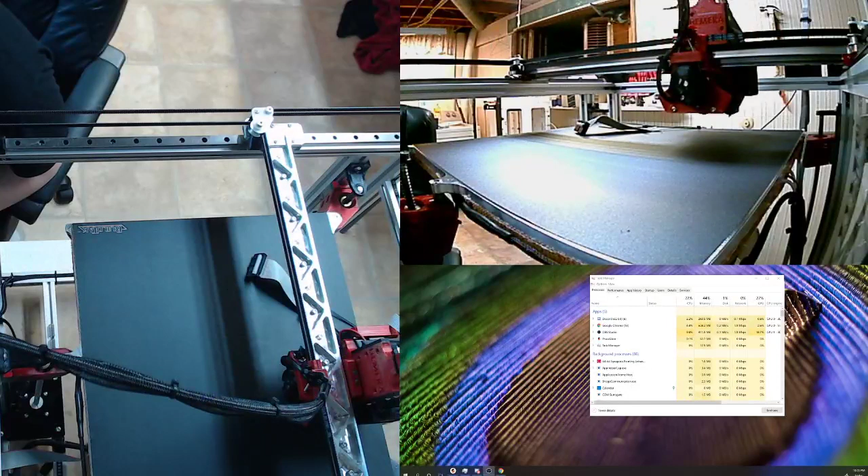You had just left last night when I identified that one of my heat set inserts in my motor plate was crooked, and Josh was like, 'You can't fix that.' And I went, 'I think I can,' and so I did.

Yeah, you should be able to fix it depending on what the issue is. It was crooked, it wasn't flat. Yeah, I mean, just reheating it and straightening it out should do the trick.

Well, what I did is I had a washer, an aluminum spacer, and an M4 screw. So I heated it up, threw down the washer, threw down the spacer, put the screw in, and cranked the screw up until it was tight, and it pulled it up flat against the washer. And then I wiggled it until it was vertical and flat, until the washer was flat against the plastic.

Nice. And I let it cool down, took it apart, and bingo. Perfect, very nice.

Yeah, the other thing is, I don't think he's got, and I was looking for him, but I don't think he actually made the motor plates, the 3D printed motor plates.

But I don't know that the aluminum corner braces need cover top plates. I don't know that they do. You don't know that the aluminum corner brackets need what? The aluminum motor plates. I don't think they use a top plate on the pulleys. Or maybe they do. Should.

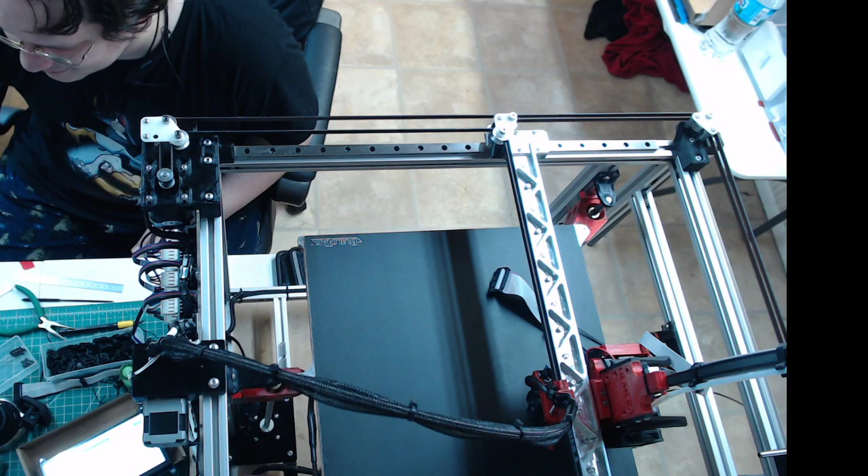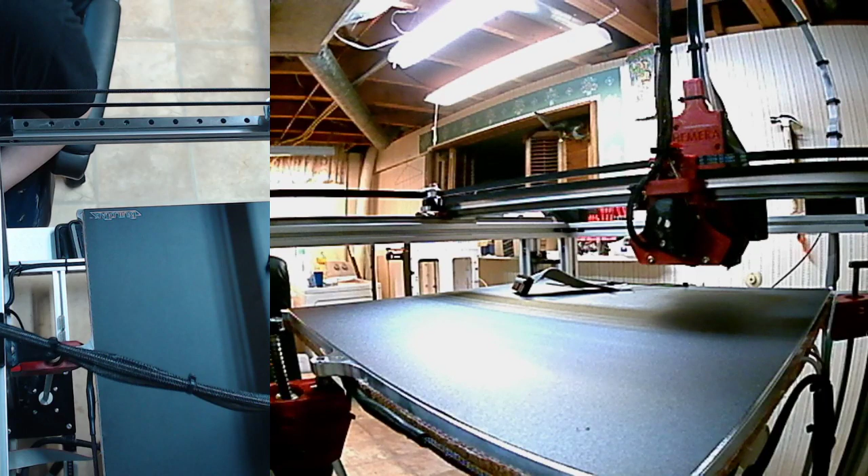So we have a Skype, or not a Skype, we already have a Skype set up, but we've got a Discord channel now, or Discord server now, and we have a Slack workspace, and we have a Zoom account.

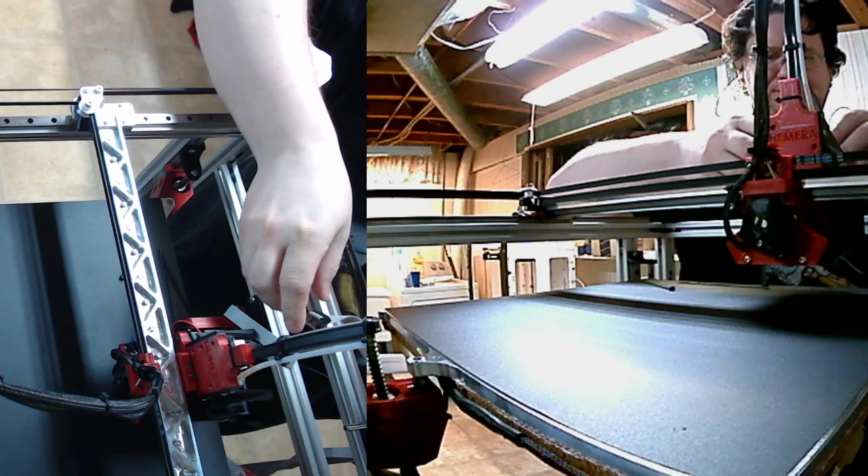This is a nonprofit, or not a nonprofit, but a small organization that I belong to that I'm on the board of directors for. So I'm like, what's it going to cost us, and what is it going to do for us as far as our ability to collaborate on projects.

I think we should pick a platform, to be honest, because the more platforms you add, the less people are going to be in the same place at the same time.

Well, the thing is, we've got people who work in different industries at this point, and some of them are working in industries that they're on Slack all the time because that's what they use for their workflows. So we got a couple of people who basically live in Slack, right?

Well, I don't know. I would personally push for solidifying on a platform, but that's just me. Yeah. And that's what I'm saying at this point. Even if it's not your favorite platform.

And that's kind of what we were doing. So right now we're going to probably spend a couple of weeks working in all of them to see what people are most comfortable with and what they have most access to, because right now we're trying to sort out our access requirements.

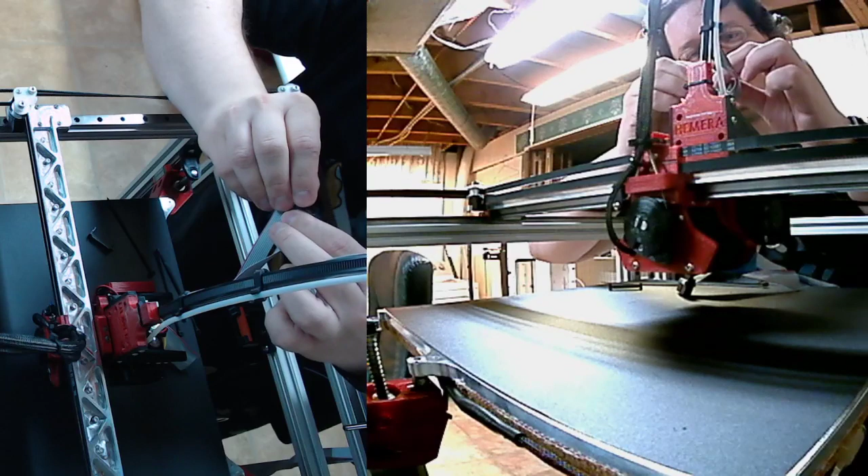I have 6 stepper motors with integrated lead screws sitting in my closet right now. You know what, I got an idea - just from a shits and giggles standpoint, you could use those integrated lead screws to do something along the lines of building a fully restrained driven axes, so you could build your little router or little machine thing. So you're saying use the integrated lead screws for all the axes?

Yeah, you could essentially do a sliding cross table kind of thing, and because you don't need high speed movement, you need precise movement. So these are 0.9 degree, right? Should be, they're the E3D ones. I don't remember 100% what they are, but yeah.

Interesting thought. It would make a whole bunch of stepper motors that are essentially useless to me useful. Because that way you'd have a lot of Z travel, but you don't need to use the whole thing - I mean you could even cut the lead screw, but I wouldn't necessarily want to do that. You could essentially build a mill. Yeah, it's definitely an interesting idea, one worth exploring.

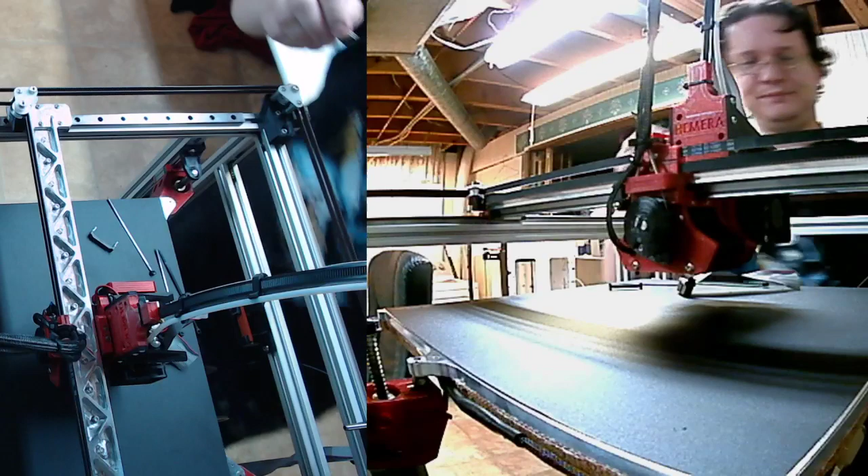He's just talking about some of the electrical safety stuff that I've posted previously, about standardizing wiring colors and things like that. Which is why I've got many spools of wires in various colors, because I want the colors to match what I need them to do. So in my AC circuits, I'm using white, black, and green, or white, red, black, and green.

Your black and red are your hots, your white's neutral, green's ground. In my DC circuits, I'm using red and black, although I almost wish we didn't have red and black defined as positive and negative, or positive and ground. We're basically running 24 volts on pretty much everything, right? Right, and black and red's a pretty standard color scheme.

It is, but do we have any 5-volt circuits? Do we have any 12-volt circuits? Are we just running 24-volt circuits? I am, yeah, aside from the AC stuff. So that's the thing - I think there are color codes out there for 12-volt DC, 24-volt DC, or maybe if we had a wiring chart. That's part of the wiring stuff.

I think at work we use all blue. Yeah, I think we got blue and blue with a white stripe for the positive and negative DC. Yeah, that's kind of what I'm thinking, that there are standards like that. I think it's pretty common. I would go to work and look up exactly what our color schemes are, but...

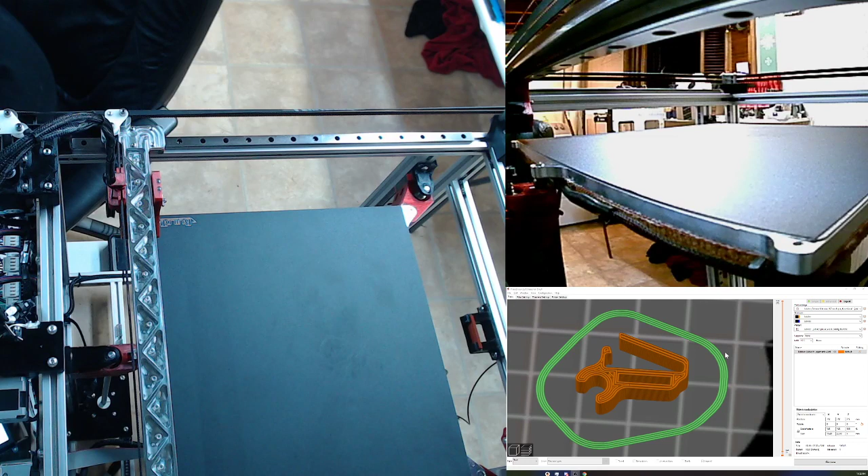I find it weird that you can't right-click on the models in Slicer. It'd be nice if you could right-click and delete, or right-click and hit update, and if you updated the file, it would update the CAD, like re-import it. Yeah, I think that would be cool. Feature request, maybe. Well, Josh has changed the way the...

Oh, you even oriented it. Good. Did I? Well, it's oriented correctly. Whether or not you did it on purpose, I have no idea. Oh yeah, of course I did it on purpose. I'll take credit for that.

I kind of want to upgrade or replace my desktop computer, and I actually have one that should do it. It's not easily accessible. I have too many computers. Well, I have my main desktop computer, which is substantial. Then I have a pretty nice laptop that I ordered back in November.

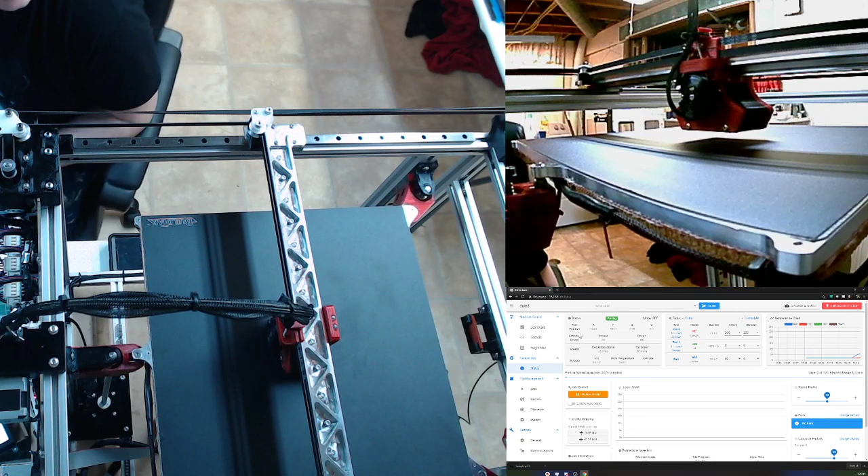And then I just picked up a Surface tablet for like 200 and something. Or I mean a Surface Pro, rather. And I'm not going to count my work computers. Oh, I have two work computers in my house as well, and I have two laptops that are dead in my closet. And I'm not counting my wife's computer either. I have my nice MacBook Pro that I got last year, and I really ought to bring it out and plug it up out here and use it because it's got the i9 in it, 32 gigs of RAM, and a terabyte flash drive.

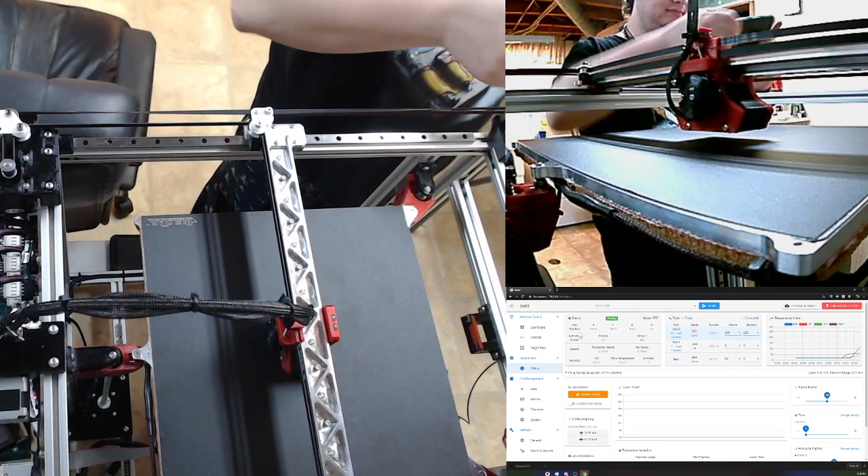I think the Gimbal Mount is actually doing for you - well, here, let me snap a picture of what I'm seeing right now. Discord... thought it was going to change. So, oh, that. Yeah, that's pretty.

Like when it's up here, it'd be nice if this thing could tip back to relieve that bend a little bit. I mean, it's still gentle, but it would be nice. If it does tip back, how much of it is it actually going to relieve? I think quite a bit. Well, I meant compared to what's below it, right? I think it's in our... True, if it's gimbaled, it's just moving the bend somewhere else, I guess. But yeah, it'd be moving the bend down farther away from the zip tie, which is going to limit - the zip tie is going to limit your amount of bend that you can have.

So was he going to take the zip tie out? I thought he was going to do that. Well, that's weird. Huh, not sure what that was about. Hey, it purged. Good. Oh, did it do the purge?

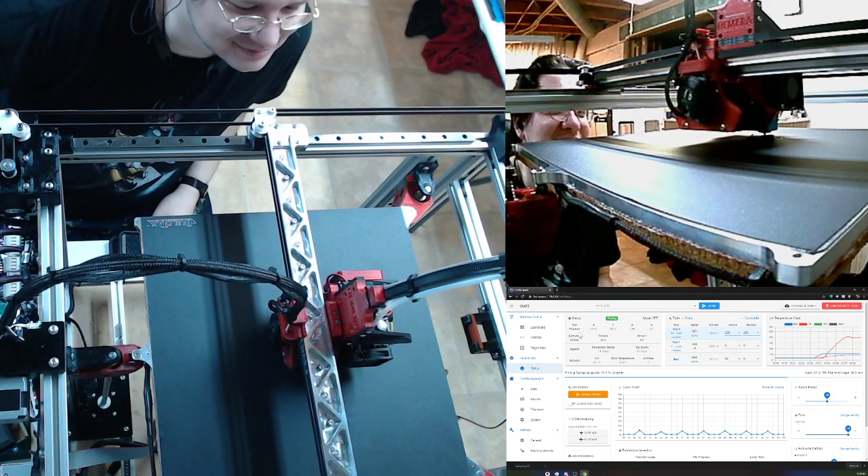Okay, so I don't know what I did. Maybe it's still trying to open it. Maybe I've got too many things running. I would not be at all surprised if I have too many things running.

All right, so I have my locking plate. I have carriage parts, I have a twist block. I have 3 of these, and I don't know which one I got that's the best one. All 3 of them have been polished, all 3 of them very well.

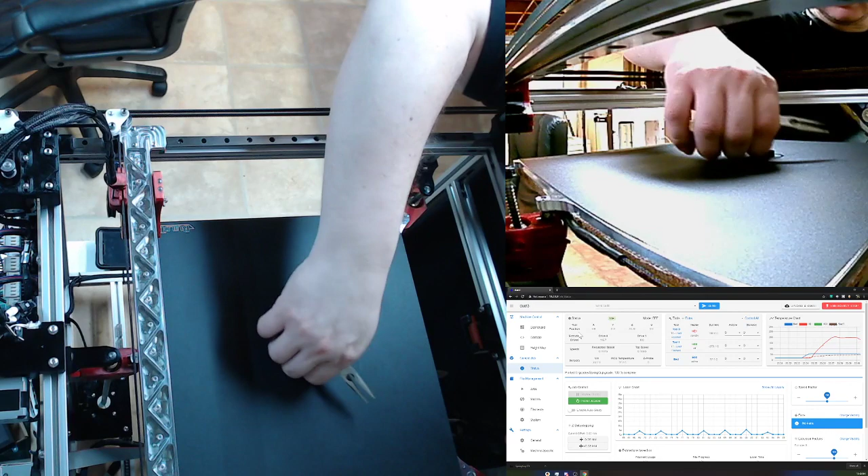So I somehow ended up with 2 complete sets of carriages. I printed 2 sets, and I don't know why I've got 2 sets. Carriages, like the part that goes on the axis, the clamps to the crossbar. And I have 2 lock plates as well. Does one set have serial numbers? None of the sets have serial numbers. Do I need to print new ones? I don't know. I hope not.

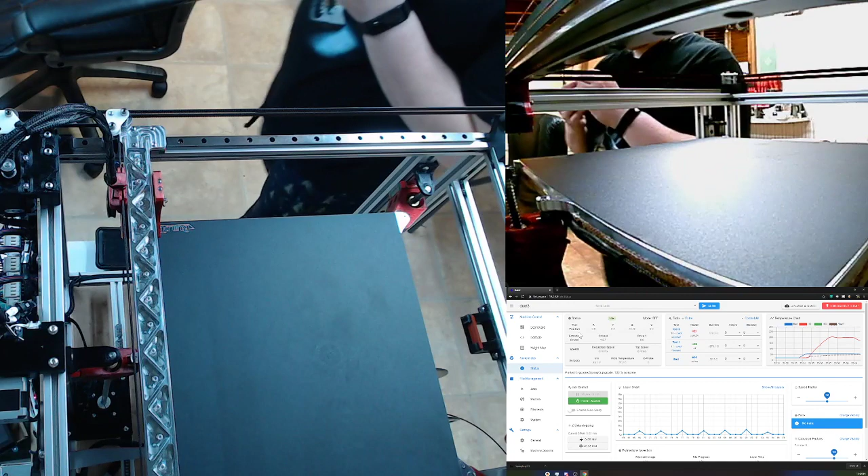I also don't have one. I don't know if they've got one. I think we've got an STL already of the one with serial numbers. Oh bother, I actually have 4 of the plates in the back because I was trying. Some of them have serial numbers, some of them don't. I have 1 with serial.

See, I have CPL01. And I couldn't tell you if CP, and I have two of them. I printed one at 0.2, and I printed one at 0.12, and I like the one that printed at 0.12 a little better. I don't like either of them, but I'm gonna end up sanding the back until it's super smooth.

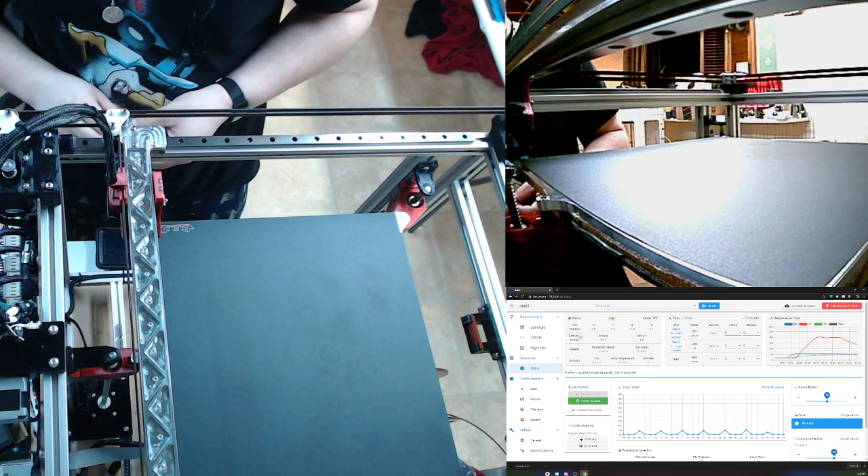Where are you sanding what now? So on the lock plate, CPL, the part that goes in the back of the carriage lock plate. You don't really need that to be smooth. You're talking about where, like the side with the twist lock, or the side with the wires? The side with the wire. Oh, okay, it doesn't need to. I mean, that doesn't really need to be smooth because...

They don't actually touch. There's a, what is it, that Belleville spring that goes in the back there, and I know he's adjusting it to add another spacer on it. So probably, yeah. I was gonna say the cup does fit the spring nicely, but I'd actually like it to grab a hold of the spring a little bit, I think. Okay. The reason for that is there's nothing keeping the spring from flying out of there while it's printing.

Okay, so I had two ideas. One would be, I'm also loose on the shaft. So what I'm thinking... Oh, the spring cup? Yeah, I'm looking at the spring cup. So I have a peg here, and it looks like you made a clearance hole instead of a hole that would grip a hold of the shaft. I did want it because I wanted it to slide up and down the shaft.

All right, so this might be good for like a front cup if it grabbed a hold of the spring, but I actually want to make it so that it could grab a hold of the shaft and the spring and keep it from flying away. Oh, so you want a rear cup? Yeah, this was supposed to be a front cup. That was supposed to be a front cup. Okay, so it does need to hold the spring a bit tighter, but other than that, it works great for a front cup. It was designed as a front cup, and I may have given it a little too much clearance. What I was thinking you would do is put the spring in it and put in a drop of super glue.

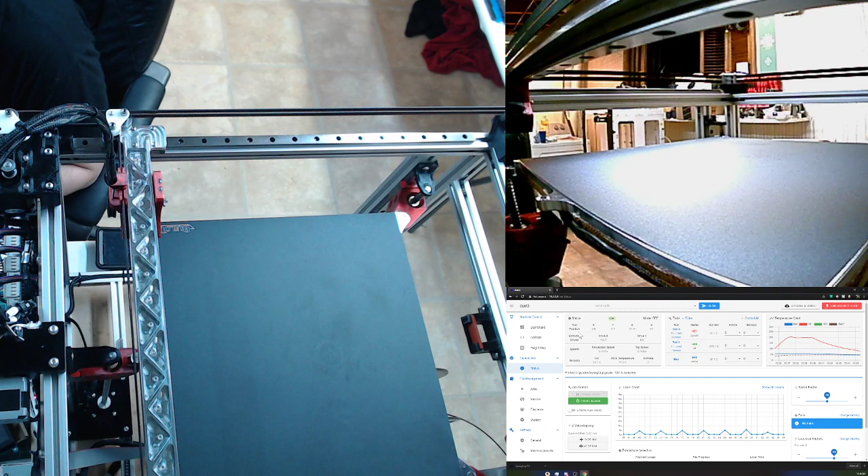One of the things I was thinking about for the shaft part, or keeping it from going around, instead of... I could bend the... What's the inside diameter on the spring? Inside diameter? Looks like a 7.6. Okay.

All right. So what do I want to do in the meantime? Oh, I know. While you're doing that, I can start doing something about... Oh, I know, I need to start looking at the wiper.

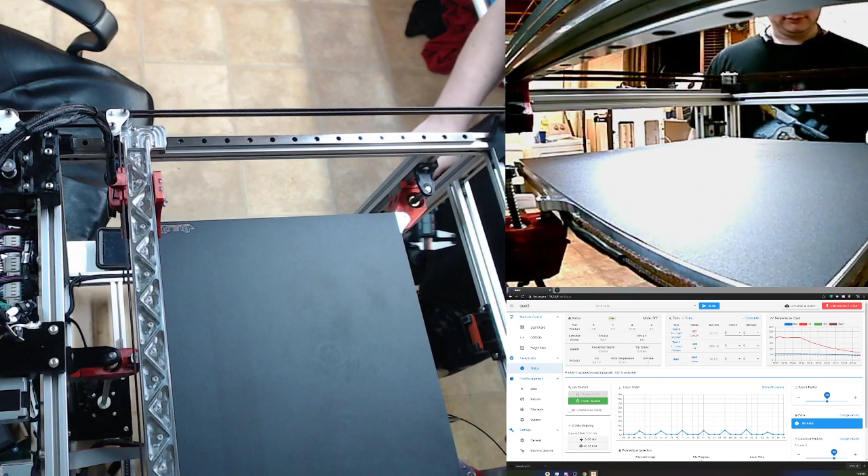Wonder what Ivan's like in real life, if he's as excited in real life as the energy he puts into his videos, or that's just a persona. You know what, I hope he is. I hope he's as exciting, a real person like that. Yeah, me too. I mean, I'm sure he's not always that excited, but I feel like that's kind of his personality. Well, if he was always that excited, he probably drives the people around him crazy, which isn't necessarily a bad thing, but there you go.

So I'm watching this print, and I have been watching it pretty closely because I've had my Y driver shut down twice in the last two prints on this, three times now, as I was printing this particular model. So I'm not really sure why, but there you go.

All right, so you said the inside diameter of the spring is 7.6, right? And the outside diameter of the spring is? So it's 9.5, or no, it's 9.4, I think. Hold on, let me look. Yeah, it looks like I'm sitting around 9.45. Okay, yeah, for whatever reason, I had it set at 9.53.

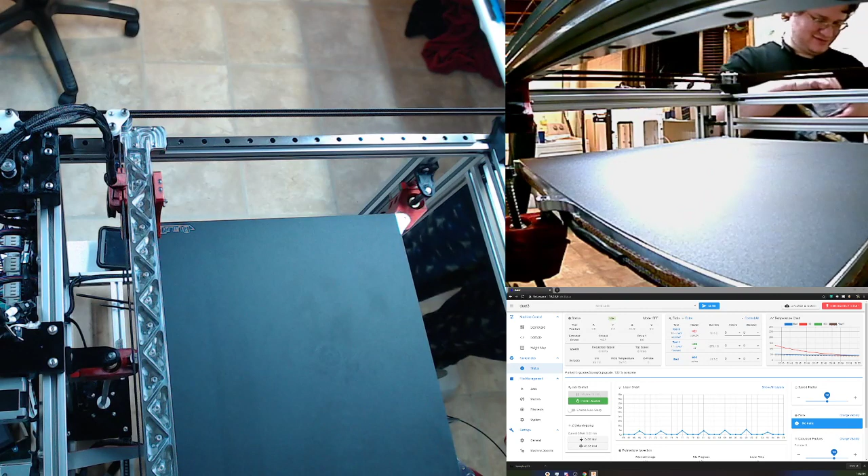Random question, do you ever watch Davie504? I'm sorry, who? Davie504? No. Who is that? It's a random guy who, honestly, I don't even know why I find him so entertaining, but he plays bass guitar, and his entire thing is basically talking about how bass is the best. Everything is bass related, and he's just kind of funny. I don't know, it's hard to explain exactly. Oh no, I get it, believe me, I get it.

Is the spring cup long enough? Yeah, I wouldn't make it any longer at all, for sure. Oh, I was actually going to make it shorter if I could get away with it. Oh yeah, you could make it shorter, just not longer. Ah, got it. All, because right, especially if we go with shorter springs. Oh yeah, it's just gonna push everything out more. I might end up cutting the spring if I need to.

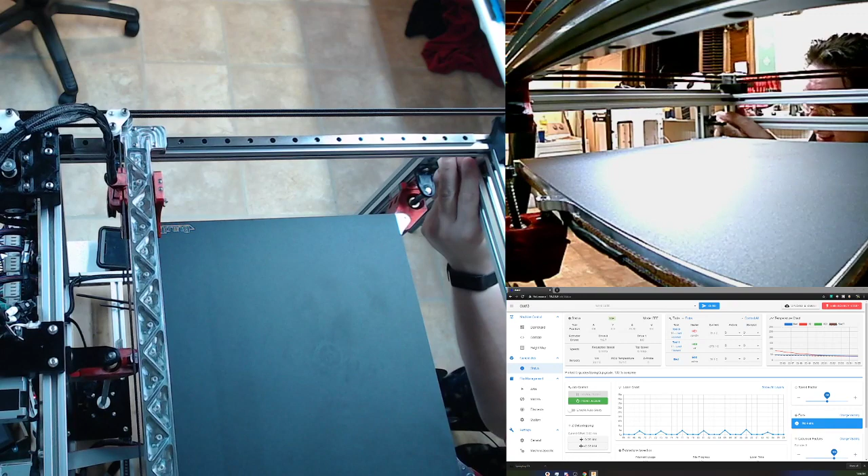Yeah, for the next tool, I've been kind of going back and forth about what I want to do. Do I want to just print an identical tool, maybe with the addition of the extra bolt like I was talking about for the zip tie, or do I want to try to design something for that big fan that I got sitting around waiting to be used? Okay, good call, that could be a thing.

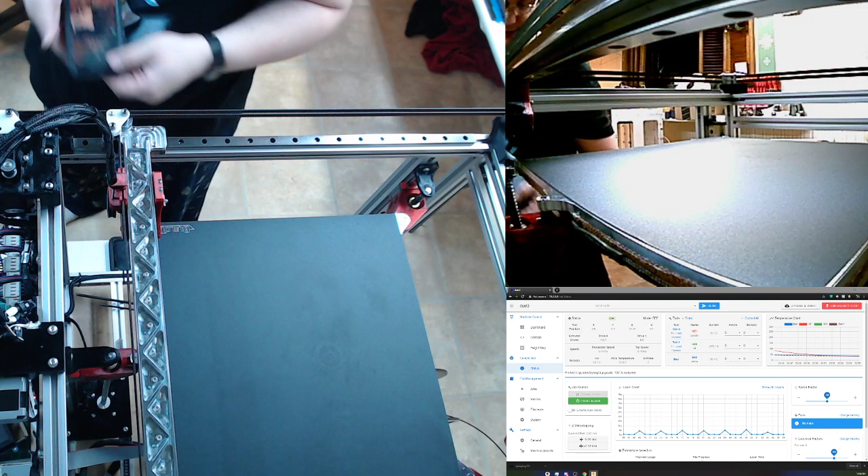And if I do design something for the big fan, do I design it so that I can use it as a tool changer, or on the tool changer, or do I design it just to run the one tool for the time being, just to see what kind of performance I can get out of it? Oh, that's a good call.

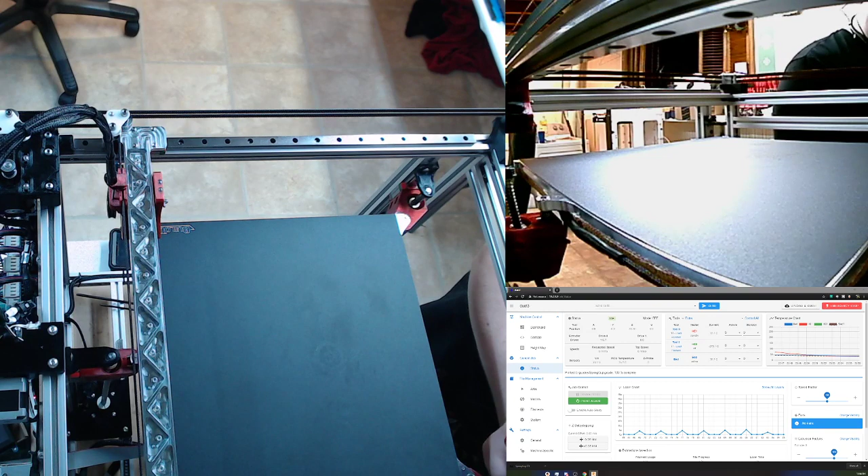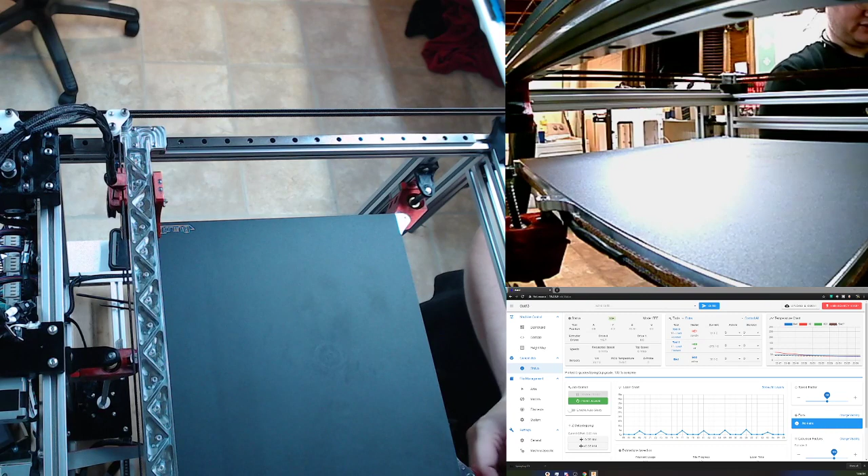So part of me has been thinking about making a Bowden tool, actually. Yeah, you were saying that. Because I just think it'd be easier to get it hooked up to a Bowden tool for temporary purposes, just because I won't have so much stuff that I have to work around, you know what I mean? Yeah. But that also puts me in an interesting spot of if I do a Bowden tool, how do I hook it up? Oh, good call, yeah. So... I don't know yet.

Definitely want to make a few Bowden style tools, just because I've got the parts laying around. I think I have like 2 or 3 spools of 3mm filament, so put in a super volcano, a 3mm super volcano. Think of how much filament you could move at that point. I don't know exactly how the conversion goes from changing something from 1.75 to 3, but I think the V6 ecosystem can just kind of change - there's something, you should be able to.

Do you want me to put the new spring cup in the custom tools, or live stream, either way. Okay.

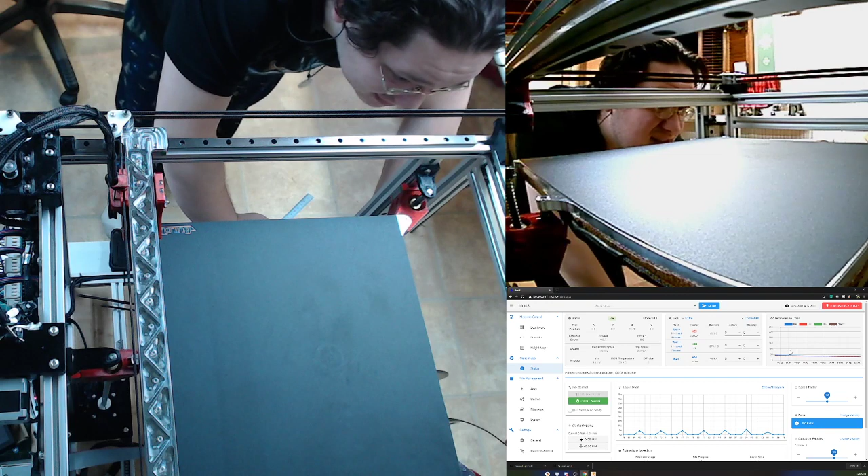Alright, anyway. So maybe there was something with the wiring, or the spring cup just printed so fast that whatever happens during a print didn't happen. I'm not sure.

Did I just get kicked off? Hello? Hey, can you hear me? Nope, can you hear me? I can hear you. How's that? I don't know, you tell me. I can hear you now. Well, then it must be excellent. Okay.

So I have 9 heat set inserts to install. They're all related to the tool line.

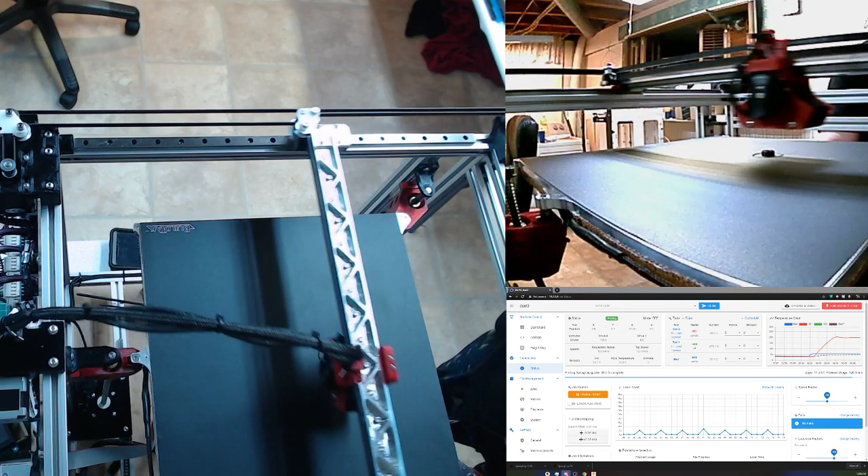I think I do need something to support the zip tie up closer to where it all meets up, because it seems to be sagging a little bit more than it was when I took that original picture. Like as the weight kind of bends the zip tie down, it...

Trying to tighten up the screws and the little crossbar that holds the wipers. I never actually tightened that part of the frame up because I didn't know where it needed to go.

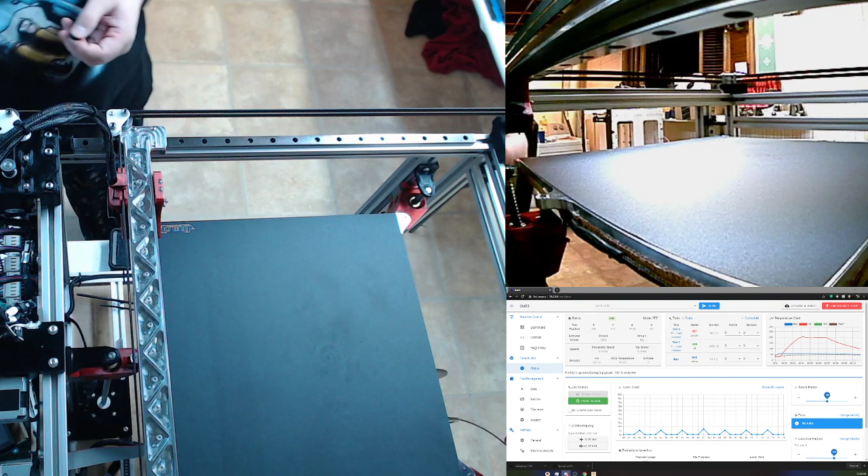Yeah, I think the base probably doesn't need to be as thick as it is. How thick do you have it right now? I can send that up too. I think it's like 1.5 millimeters thick. Mostly I can cut it down to 1. I'm sorry, how thick did you say? I kind of zoned out for a second when I was focusing on this. 1.5.

Yeah, definitely go 1, but leave the extra, make that half go to the depth. Okay, that's fine. And then, yeah, we do need to be a little bit tighter on the spring, and just a touch tighter on the shaft. Okay, fixing that. I'm not sure if it's the ID or the OD where the spring needs to be tighter though.

I mean, I can make it on the ID. Let's just, you can start with the OD. It's just really hard to see. I don't think it's actually touching the ID right now, but I've got a tenth of a millimeter clear on the ID and 0.15 millimeters on the OD. I'll just bring them down a touch.

I want to look at my slicer settings really quick. Okay. I want to try to get the boogers and the seams off a little bit. Okay. I'm still running with the default profile, haven't really messed with it.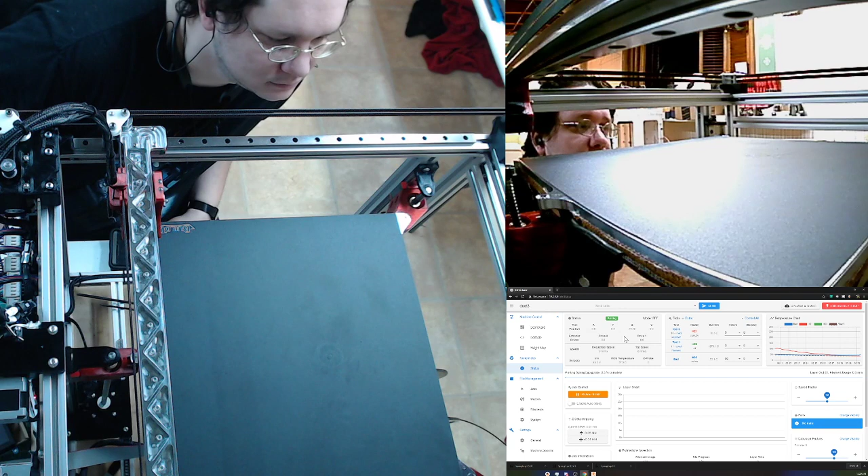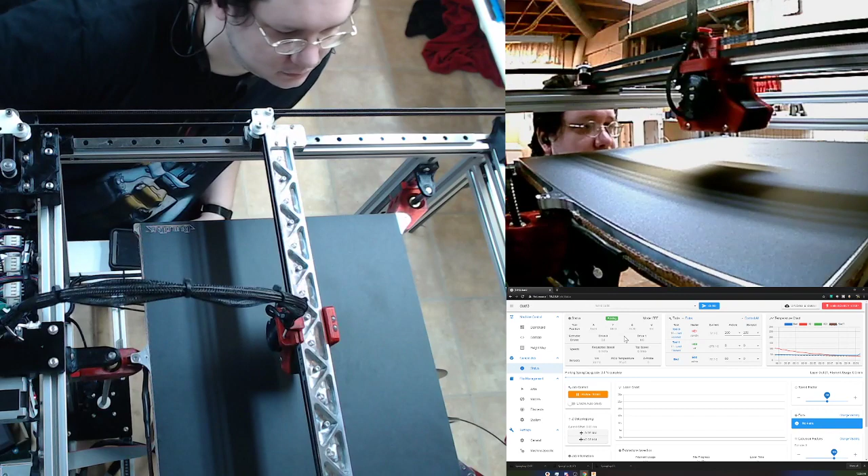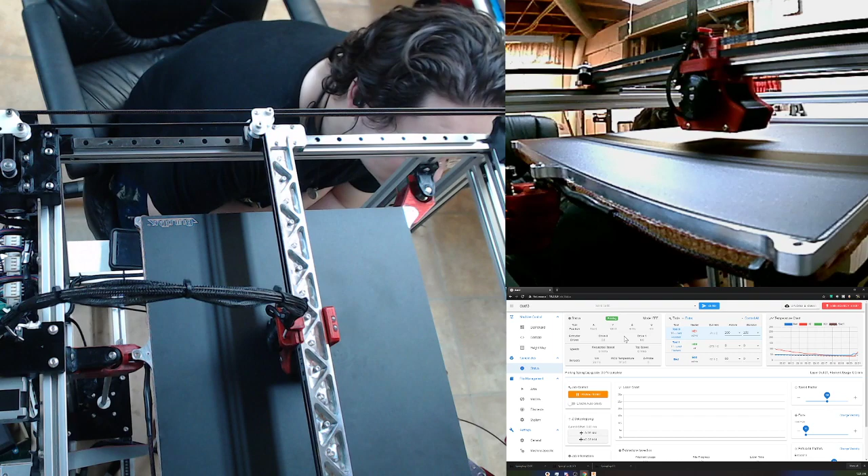You know what? I don't think I'm just gonna be able to space this out. I think I'm gonna have to make it go out farther, because if I just space it straight out, I think it'll actually get in the way of the fan duct. Hold on, maybe I'm wrong. Maybe not. It would be close though.

I think what I just need to do is tweak the whole apparatus that holds the filament, basically. Or, I mean, holds the rubber. Okay.

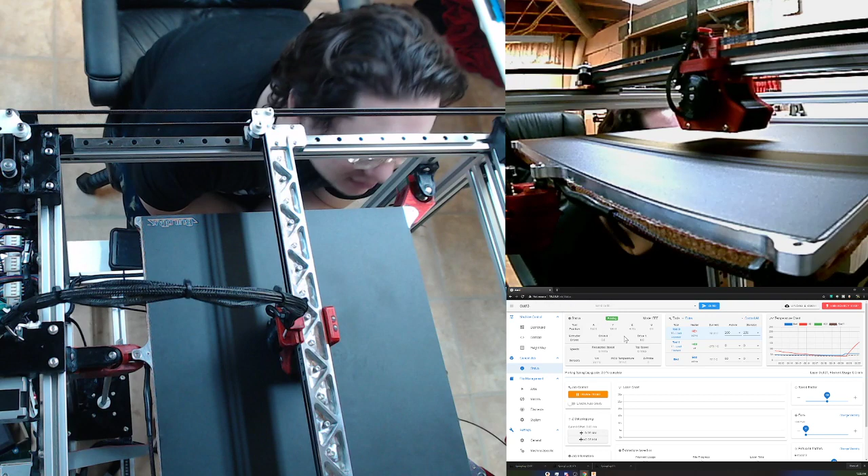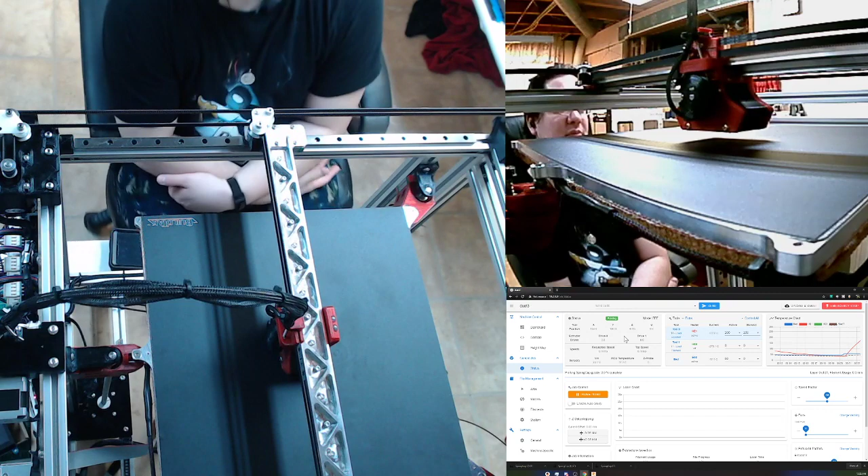I've got two challenges. One is the fan duct, and then the other one is the Z, because I would actually hit the Z stepper motor, or the, what do you call it, the piece that holds the ball or the nut for the ball screw. Okay, whatever we call those things.

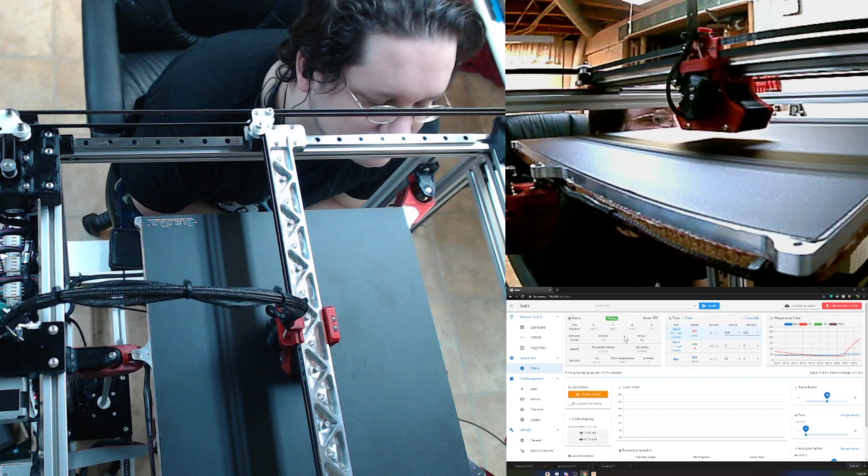Hey Siri, turn off the kitchen lights.

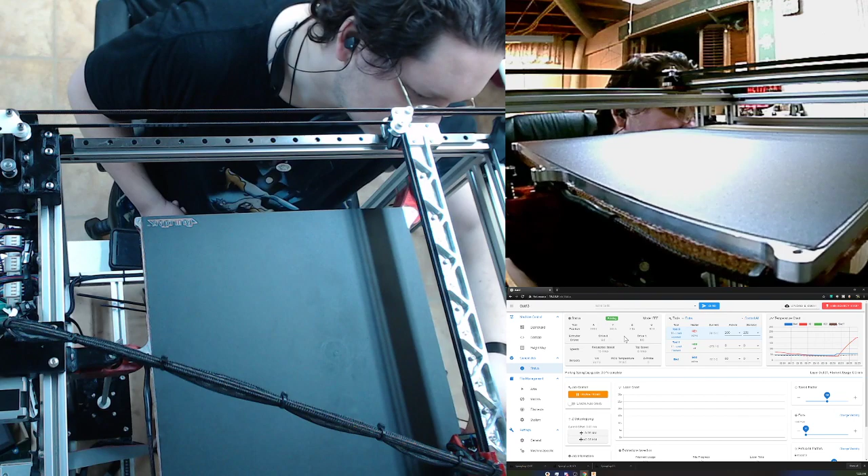You know what? I keep starting to do something and...

I think I need to do some top layer tests, because I've been doing these really tiny prints, but it looks like they get a little bit of bulging. I think maybe I need to look at dialing in the filament again. Oh, okay.

If you're getting bulging, just try backing off your flow. My flow? Yeah, there's a flow setting. Just see if you can back that off a little bit. I really am not entirely sure what you're talking about.

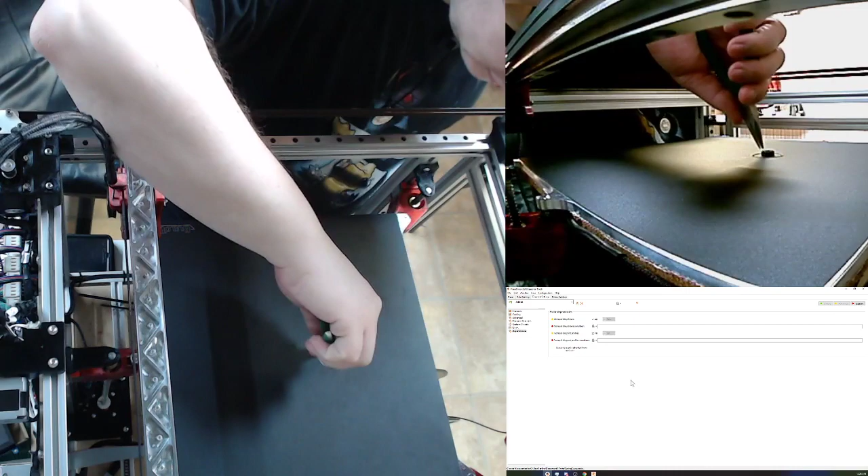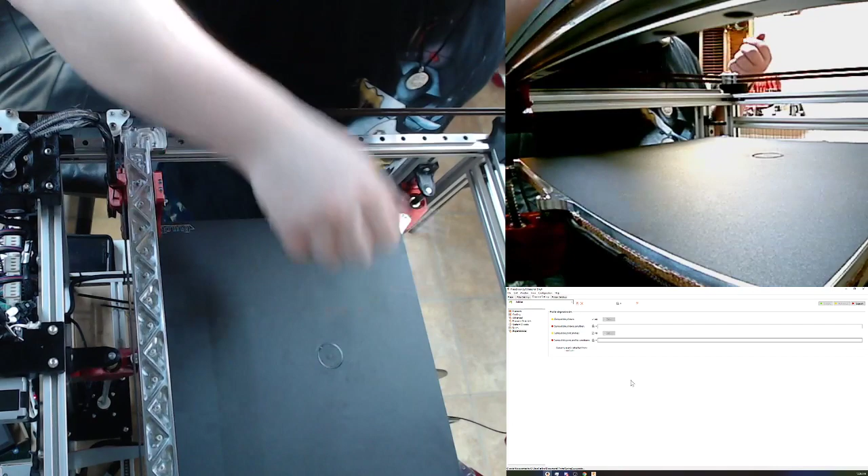Alright, the seams do look a little better. I still see a little bit of bulging out on the seam, but not like it was. All right.

There we go. Now I kind of need to press fit this thing onto the... Oh, good, that was the intent. Whoa. And you shot it across through. What's that? I said, you just shot it across through. No, I was...

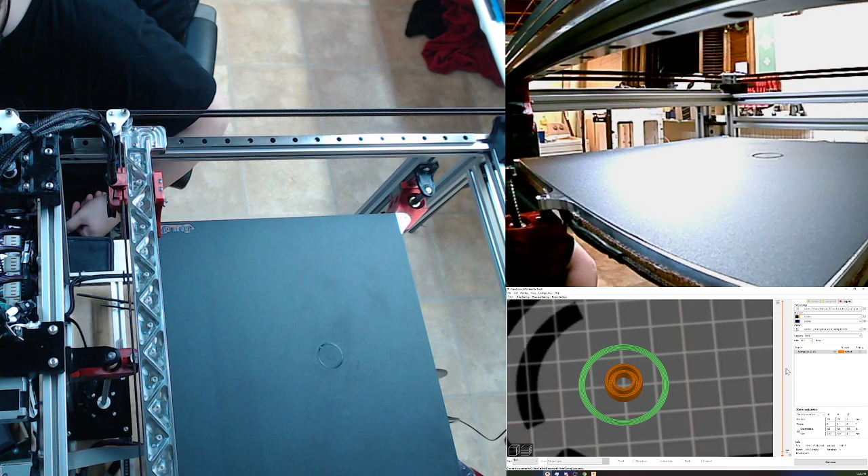I don't know if I can make that big enough to actually see it. It looks like it is. I don't know, it's just a different color, it seems like. Yeah, it's weird, it does that every single print. Huh, or almost every single print at least. Okay, I don't know what it is. Weird.

I take it back, it's not every... I see it frequently, but not to the extent necessarily as we see it in this particular picture. This is more extreme, but...

I've gone partially brain dead for a second. Upload. So that's a little tighter still. Not around the shaft, but right.

I lost my print removal tool a couple days ago, and I haven't the foggiest idea what I did with it.

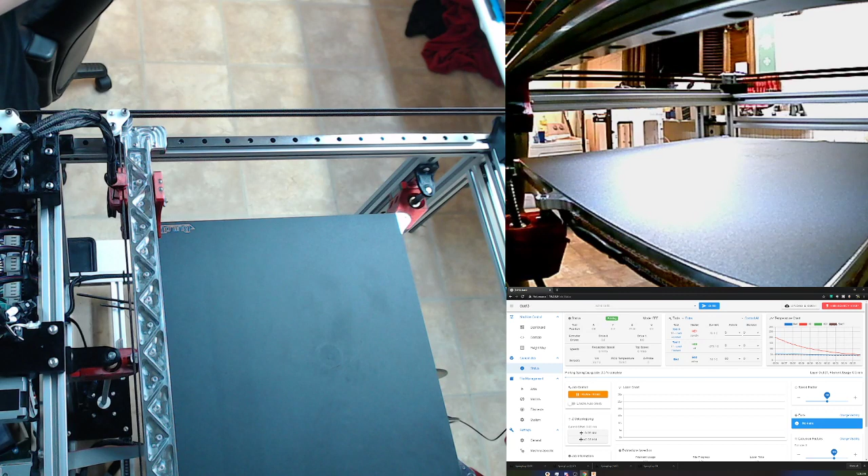Go ahead. Oh no, I'm just, the big printer, I slowed it down. I'm not printing as fast as I was before, and I have not seen another fault. The Y stepper has not faulted out on me yet, which is good. That's the intent, is that it does not do that.

You can see that first layer actually looks pretty clean. Yeah. Everything I'm looking at on Amazon right now is 20 days out for delivery.

Yeah, like I think you were saying this the other day though, it's not really. I mean, a lot of the stuff will end up shipping sooner. Which is why I'm checking Tiny Machines and Filastruder. But yeah, they say they're not going to restart restocking non-essential, so that's probably why.

Yeah, and I don't know if Tiny Machines is going to have the things I'm looking for. I'm looking for a stepper heat sink. Stepper heatsink, yeah. Well, if you can't find something, I mean, I've got a couple extra. What I'm looking for is for the big machine here, my big printer. Oh. It's got a, yep, that's exactly what I was looking at.

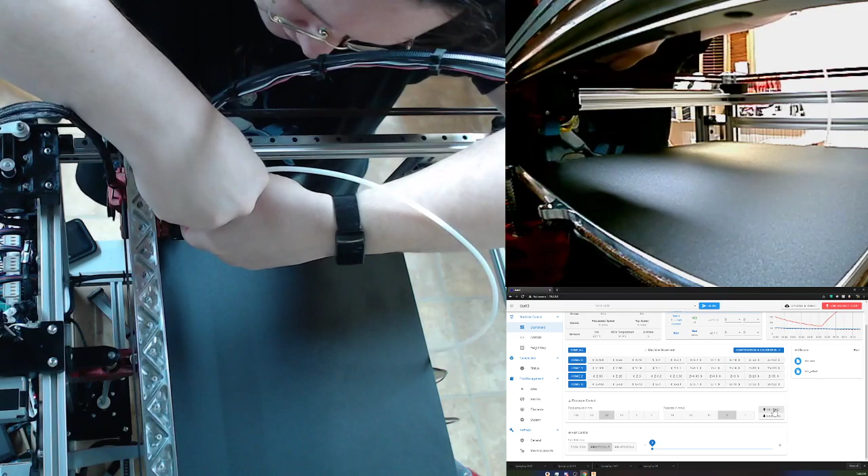Was Zyltech going to be carrying the LDO rails? No, it's Filastruder. And they already are carrying them. Did you get rails from them? Yeah, the Core XY is all LDO now. I continue to use the Chinese ones for the Z-axis. I wanted as smooth a motion as I could get on the important part, and then the Z wasn't so bad, so.

I think I got the high torque motors, the E3D high torque motors, or the compact, I don't remember - high torque or compact. Thought I remembered you saying something about having the extra strong motors at one point. Yeah, I think I got the high torque ones. Yeah, they don't have any of the heat sinks, they don't have anything listed under generic heat sink. They do have the LDO steppers though, which is nice. Well, I think there's going to be an official release of new stepper motors for the Jubilee at some point. Okay, that's cool.

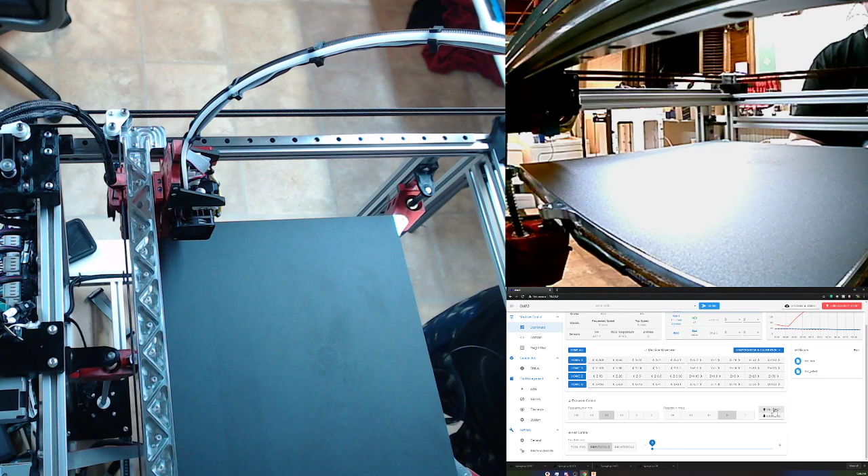I don't know that the official steppers have been released yet, and I don't know who's going to be carrying them either. But I thought I remembered hearing Josh at one point about how he's been in contact with a stepper manufacturer or something along those lines. Yeah, that's LDO. Well, there's Filastruder stuff.

Huh, these clips are actually putting enough pressure on the Bowden tube that they're causing pinch points. Oh, that's not good. No, it's actually getting really hard to push the filament through.

So when I printed them on the big box, I did have a little bit of elephant foot syndrome. Wow. That's really not good. Oh boy. Look at the filament winder.

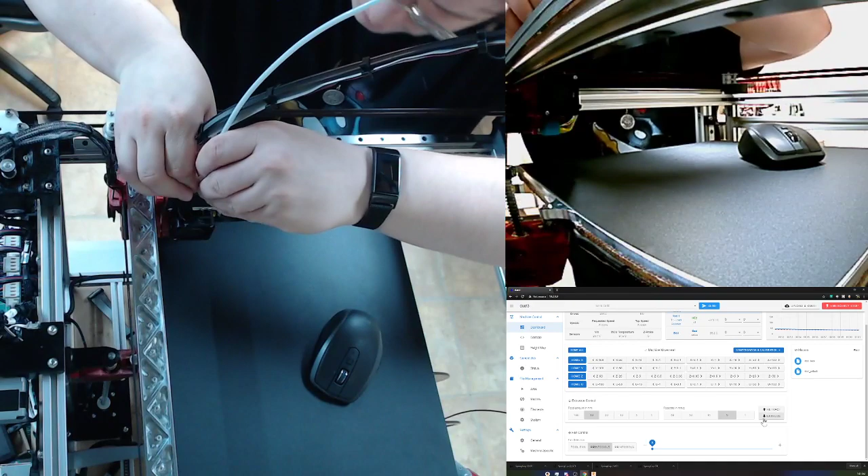Let's see, I guess Matter Hackers. Try Pololu. I don't know who that is yet. Oh really, it may be just one more - somebody I haven't seen yet. So give me just a second, I will see what Matter Hackers has first, and then I will go there.

Pololu's like a place where they do robotics and stuff. Ah, okay.

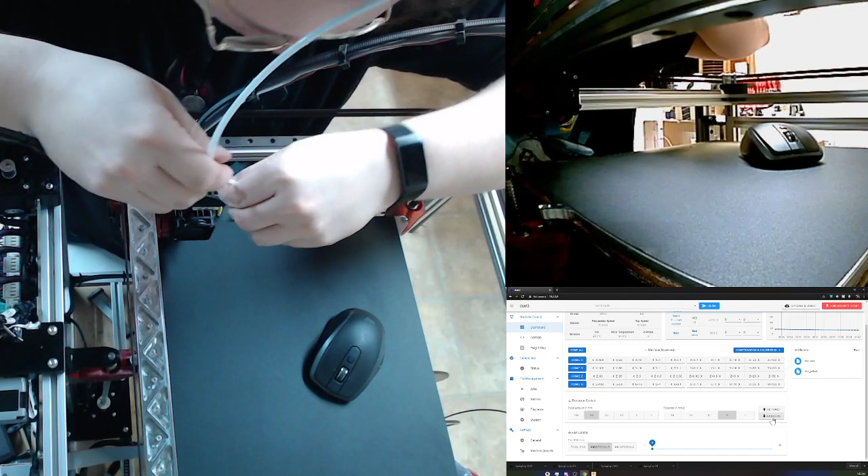Excuse me. Bless you.

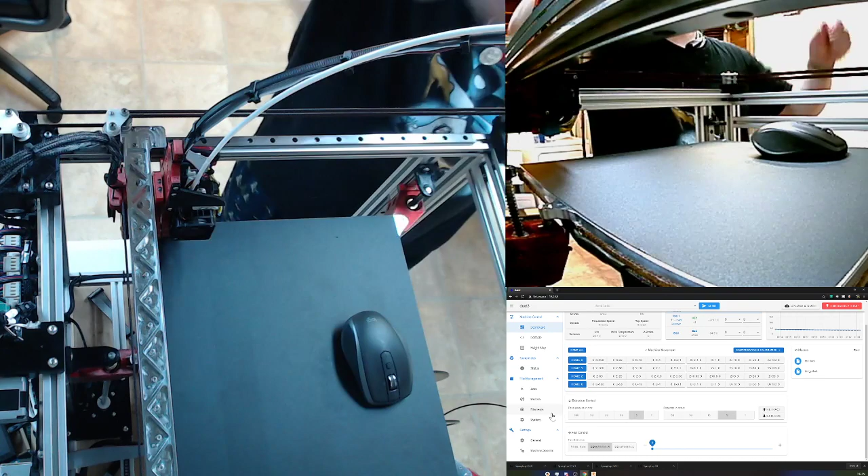Oh my gosh, it's already 1. Yes, it is.

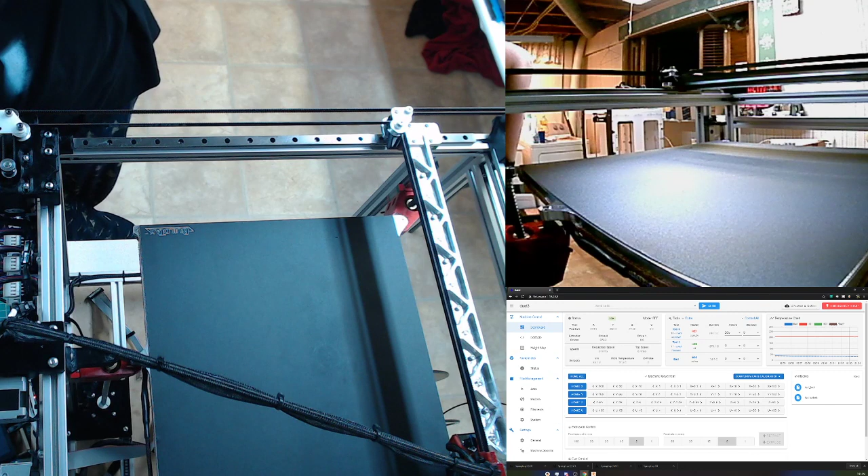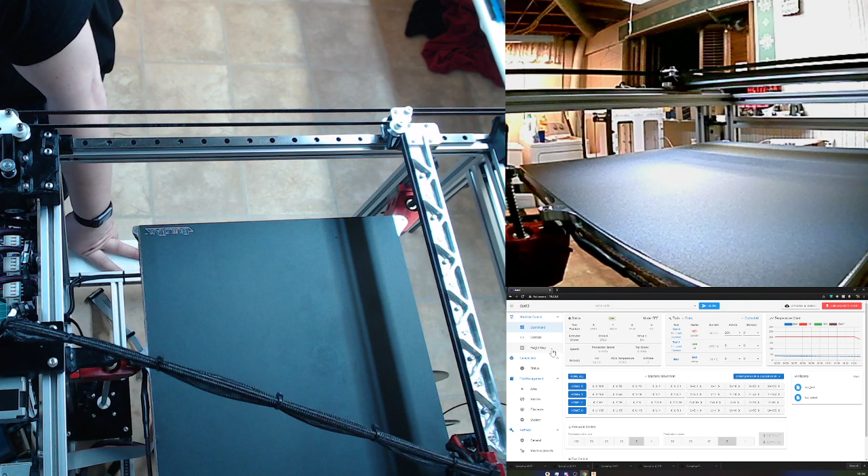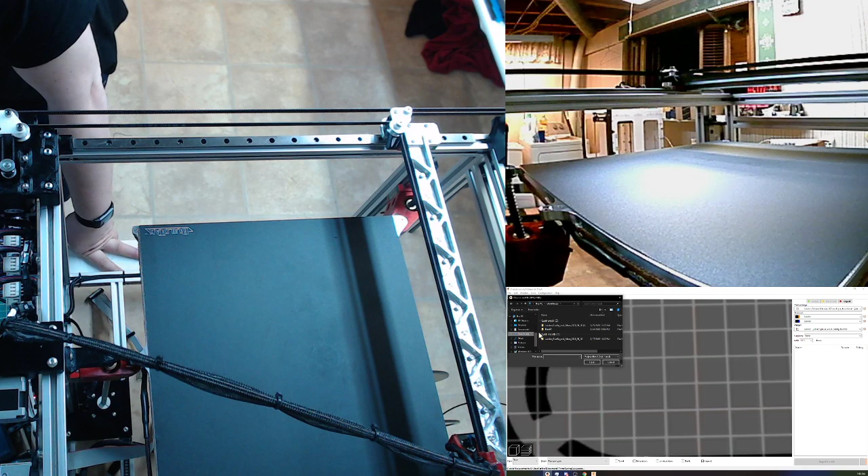So what'd you say it was, Phenom? Or Pololu? P-O-L? Pololu? Hold on, I can look it up. Oh, Pololu Robotics. Found it - motors and gearboxes, wireless, switches and stuff. Batteries and ball casters. Yeah, they have lots of good stuff. I'm surprised you hadn't heard of them before. I have, I just couldn't put the name to the thing. I've ordered from them before, I've got an account - popped up as soon as I connected. Like, really? Like, oh, these guys, right?

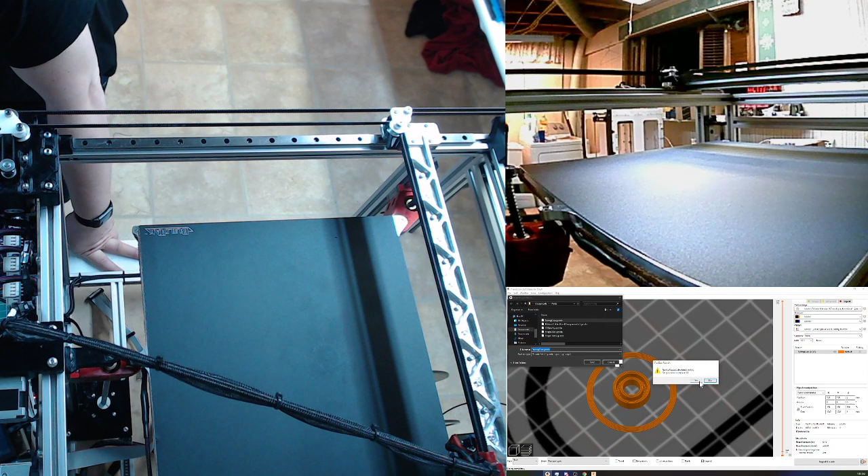This is my last print for tonight, and then I'm going to bed. Okay, did you get the connection? I got the new one.

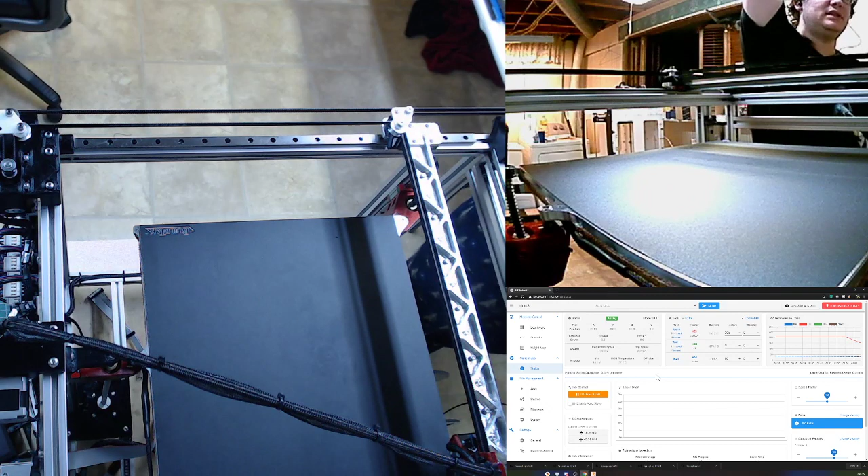All right, so with the new Bowden tube, it looks a lot better. Oh, okay.

Yeah, I'm gonna have to do something about the clips. They're definitely - I think it's the extra little bit of plastic on the inside of them that's creating the pinch point. Oh, okay. Yeah, you can kind of see it when you look at it.

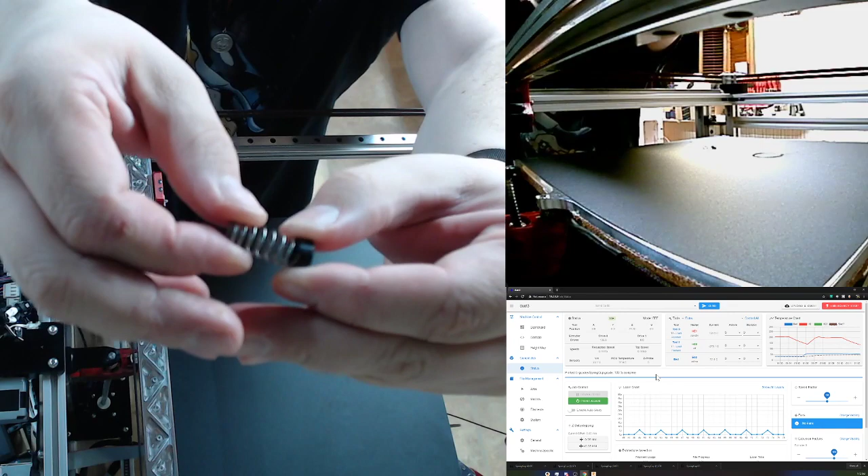And so if you have two of them, you ream one of them out so that it slides smoothly on the shaft. Oh yeah, see, now this - I don't know if you can see that, but I can pull this spring and it doesn't immediately pop out of it.

You're actually off camera. Oh, I moved - it should be on camera now. Hold on, let me... all right, so it doesn't immediately pop out. That's kind of what I was shooting for here - something that's, like you said, I can...

Well, and if you get the second one right, you print three more of them, and take two of them and ream out the center so that it slides smoothly over the shaft. And then you've got two that can be jammed on there. Jam on it. Jam on, Lee. Everybody jump.

I need to go get it. I've got three gas cans out there, and not a single one of them has an actual screw-on cap. All the caps are missing. They've got the spouts all on them, but no caps. And it's like, alright, don't I need a cap to put on here so I can go get them filled up, right?

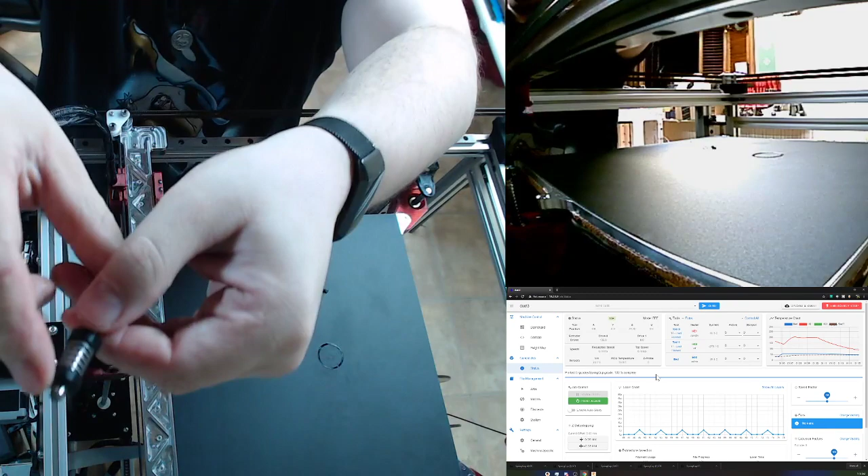There we go. Where'd my screen go?

Okay, so you got it jammed on the post now? Yes, I've got one that I can slide. Oh, did you just use one of the other ones? Yeah, it's the second best one, so it pops off pretty easy still, but I just did a light sanding on the center, and it moves pretty smoothly.

That's not going anywhere, it's not going to come off. That actually looks really good as a tool shock. Yeah, I like it. Very cool. You like those? Yep.

And you can force it down the shaft. Yeah, so I can force it down - that would be very cool if you had something to provide a shock. Essentially it's a shock mount for putting the tool on there. Yep.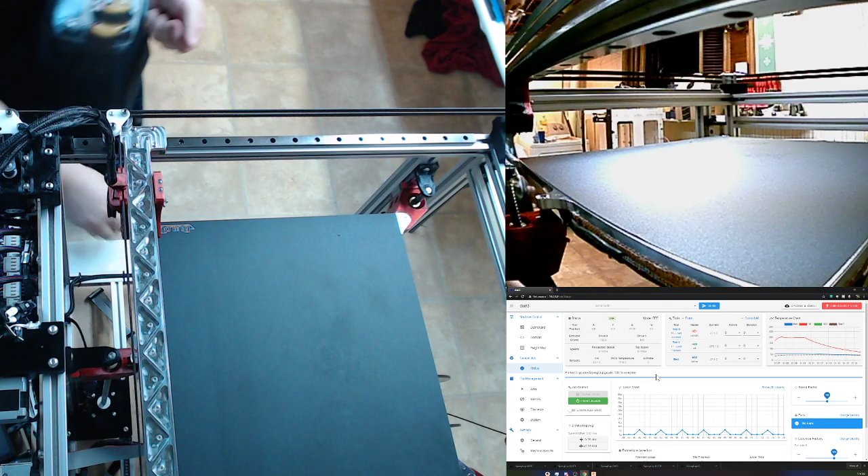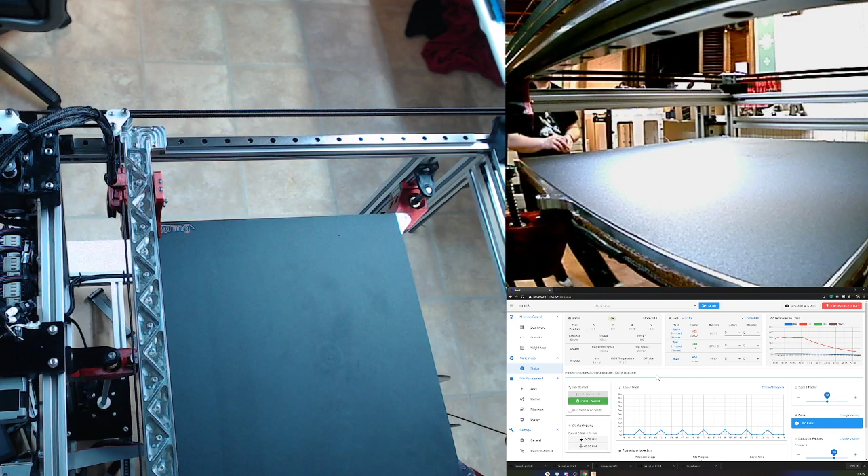So that's a thing. Yeah, I'll probably cut the spring down because I've got quite a bit of... I don't know, I might stretch it out a little bit and cut it down so that I can depress it farther. I don't care if it's a little weaker or something like that if I stretch it - I think it'll be fine.

Well, that's good for tonight. Tomorrow I'll actually make up something that'll work. I'll put them on there, and then that'll be a thing.